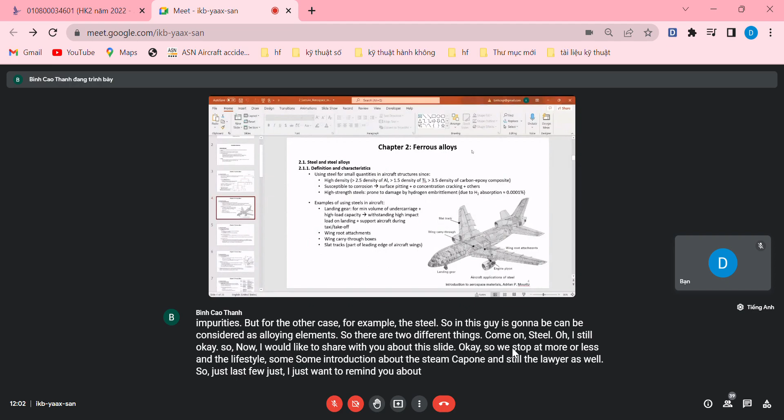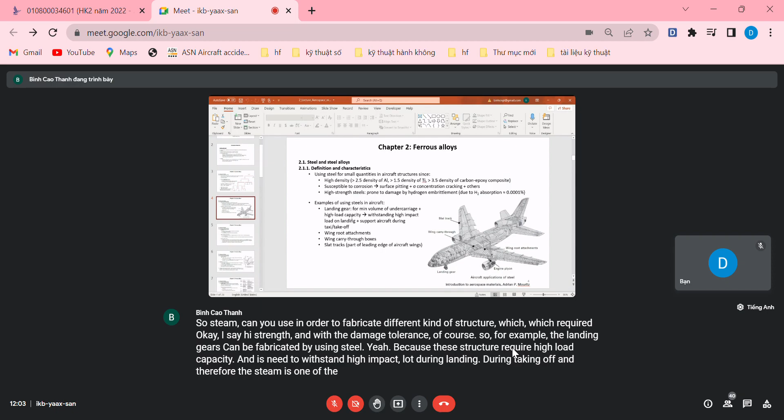I just want to remind you where we can use steel in aircraft. Steel can be used to fabricate different kinds of structures which require high strength and damage tolerance. For example, the landing gears can be fabricated using steel, because this structure requires high load capacity and needs to withstand high impact load during landing and taking off, and therefore steel is one of the promising materials that can be used to fabricate landing gear.

Other structures inside the aircraft that can employ steel as the material include, for example, the wing root attachment, the wing carry-through boxes, and the slat track, as you can see from this figure, these components.

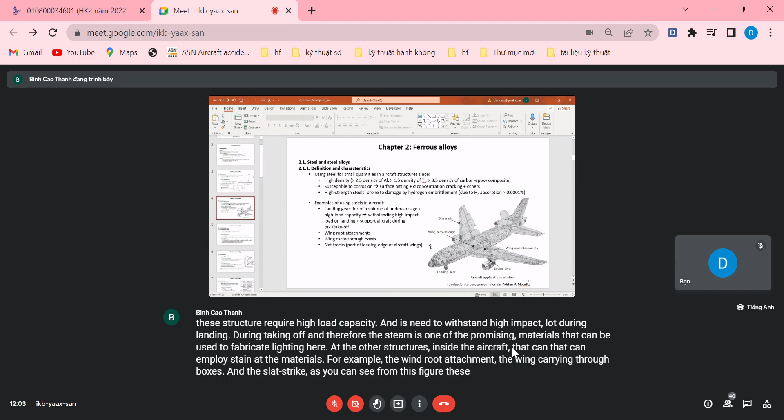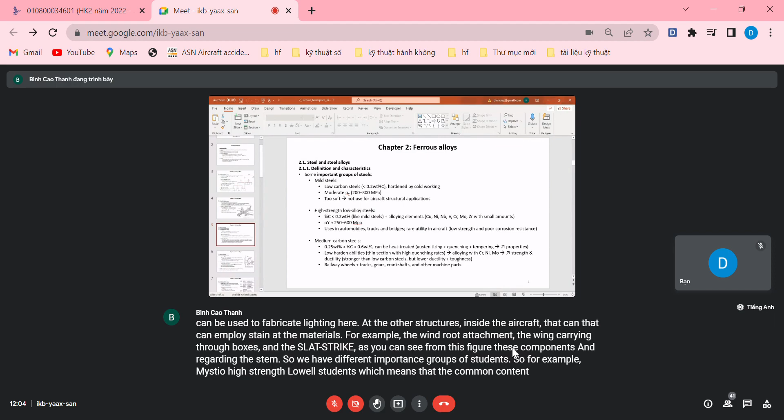Regarding steel, we have different important groups of steel. For example, mild steel, high strength low alloy steels, which means the carbon content is smaller than 0.2 weight percent, in combination with some kind of alloying elements like copper, nickel, niobium, vanadium, chrome, molybdenum, and zirconium. Zirconium is some kind of ceramic material, so you may not be familiar with this type of element. We may call them rare earth elements.

So the strength of the high strength low alloy steel can range from 250 up to 600 megapascal. It's not so high, but it can be used for automotive applications, trucks, and bridges. But since the strength is not enough, it cannot be used in the case of aircraft, especially in terms of strength and corrosion resistance, which need higher values in order to be applied for fabricating aircraft structures.

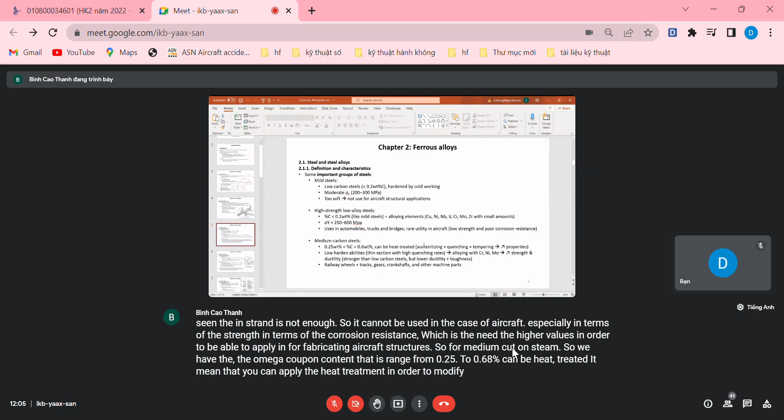For medium carbon steel, the amount of carbon content ranges from 0.25 up to 0.6%, and it can be heat treated. This means you can apply heat treatment to modify properties of the steel. So basically we need to apply heat treatment to improve properties. I do not want to focus so much on this steel because we talked about it last week, so I just want to remind you of some points we already discussed.

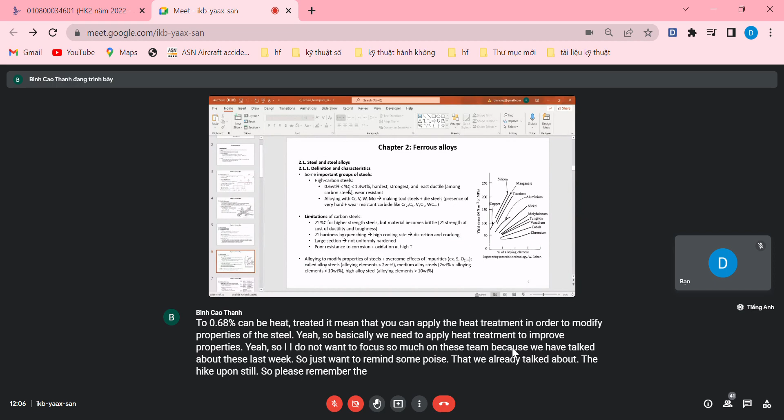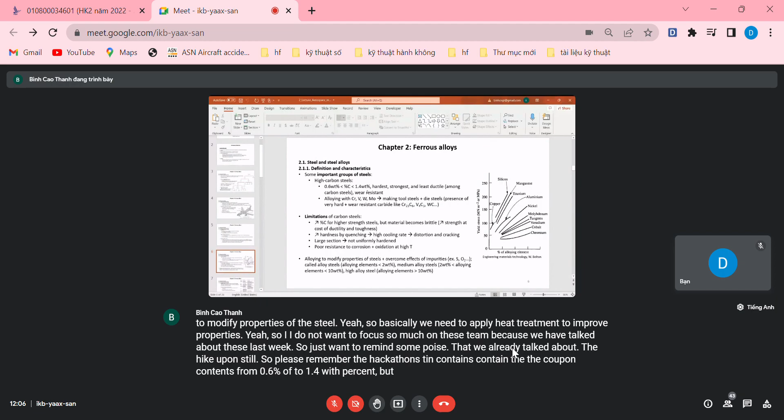The high carbon steel, please remember, contains carbon content from 0.6 weight% up to 1.4 weight%. But please remember that the higher the amount of carbon content, the more brittle the material is, and therefore the amount of carbon content should be controlled. The higher amount of carbon content, the less ductile the material is, so because it's more brittle, in other words, less ductile. Yes, but it has a higher ability of resistance because of the enhancement of carbide, which forms based on the higher amount of carbon content.

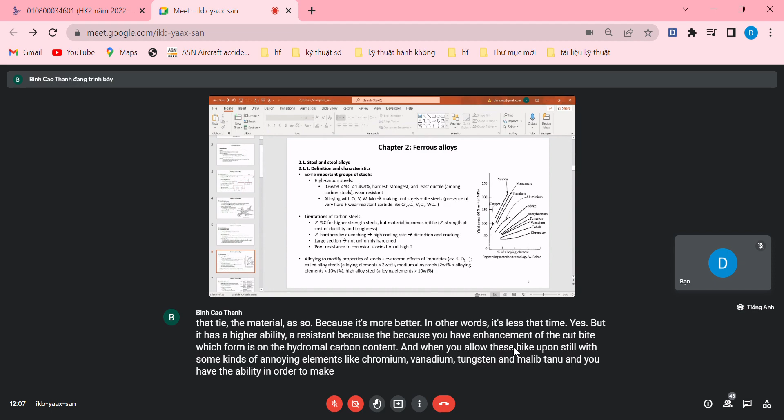When you alloy this high carbon steel with alloying elements like chromium, vanadium, tungsten, and molybdenum, you have the ability to make tool steel or die steel. This is because there's a possibility to form different kinds of carbides, like Cr23C6 or V4C3, which can enhance the wear resistance of the material.

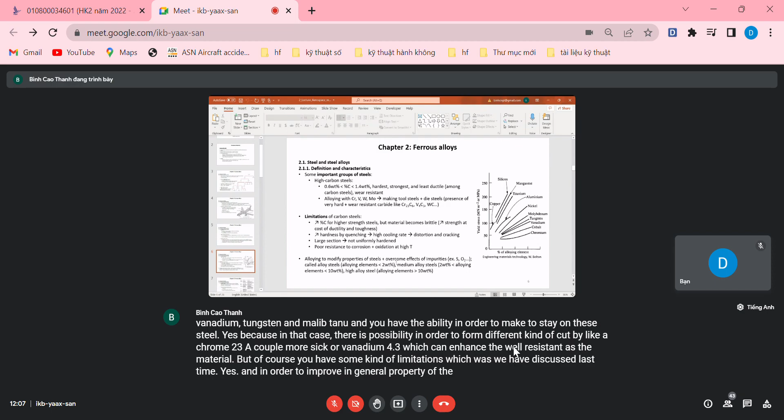But of course, you have some kind of limitations, which we discussed last time. And in order to improve the general properties of the steel, you need to add alloying elements. Depending on the amount of alloying elements, you can classify alloy steel into different categories.

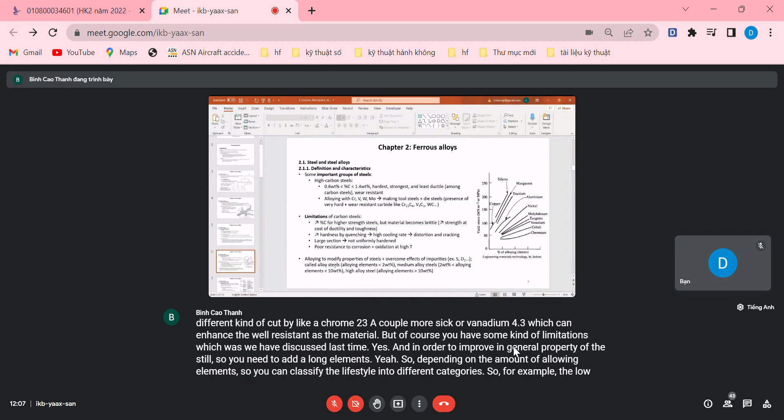For example, low alloy steel, medium alloy steel, or high alloy steel, where the alloying elements are larger than 10 weight%. If you look at the graph on the right side of this slide, you have the relation between the yield strength and the amount of alloying elements.

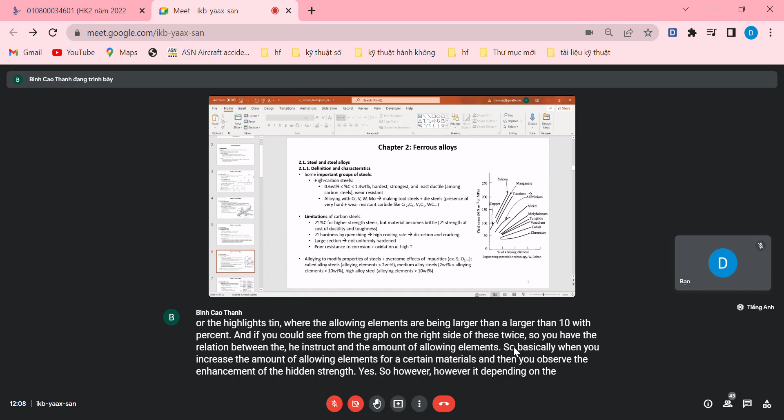Basically, when you increase the amount of alloying elements for certain materials, you observe enhancement of the yield strength. However, depending on the alloying elements selected for steel, we have different degrees of enhancement.

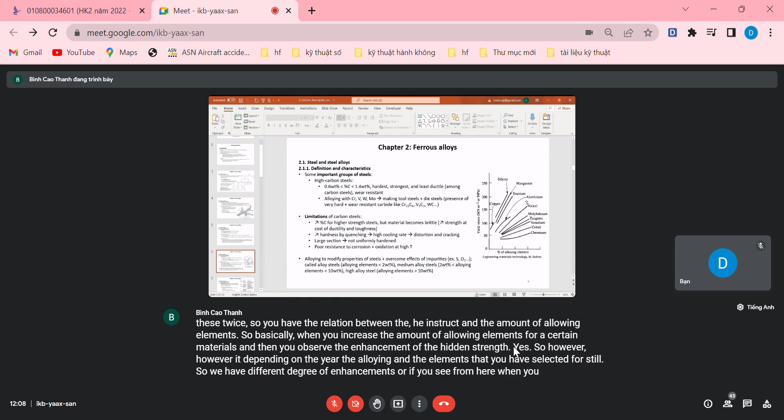If you look here, when you alloy the steel with titanium, you have more or less the highest slope of the line. So it means that with a small amount of titanium as an alloying element, you have a significant enhancement in terms of the yield strength. It's quite easy to observe here.

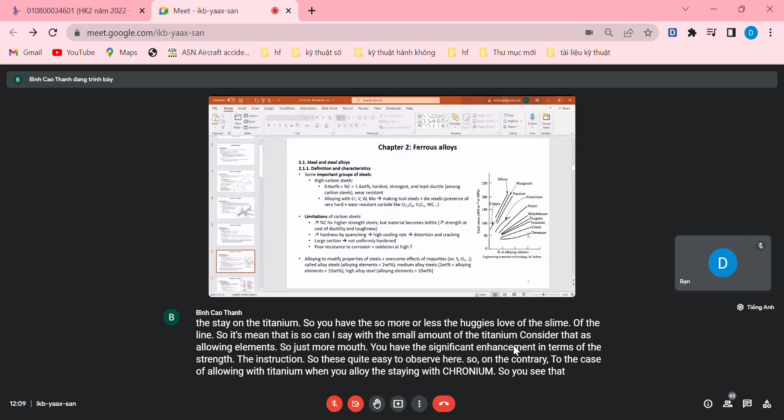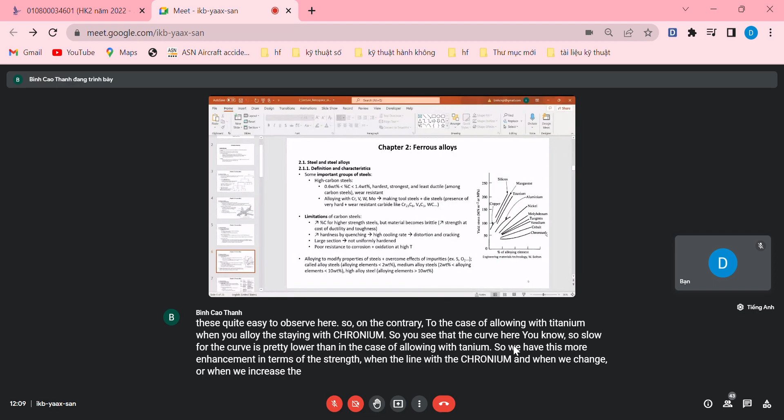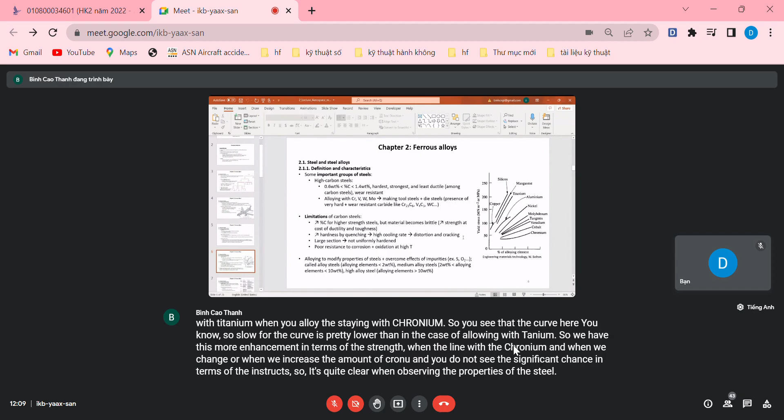On the contrary, when you alloy the steel with chromium, the slope of the curve is pretty lower than in the case of alloying with titanium. So there's less enhancement in terms of strength when alloying with chromium, and when you increase the amount of chromium, you do not see significant change in terms of the yield stress. It's quite clear when observing the properties of the steel, the yield stress as a function of percent of alloying elements.

So the other important group of steel is stainless steel. Stainless steel is one type of steel which can be synthesized by alloying with a high amount of chromium, for example, at least 11% by weight of chromium.

Together with chromium, you can add additional alloying elements, such as nickel or molybdenum, for improving corrosion resistance of the steel. There are three types of stainless steel which we mentioned last time: martensitic stainless steel, austenitic stainless steel, and ferritic stainless steel.

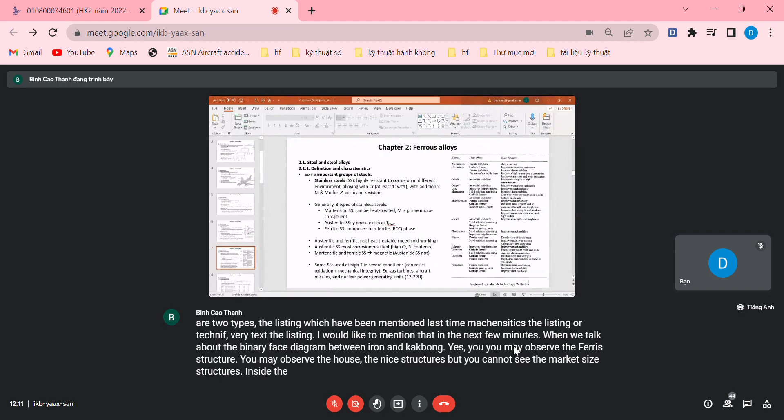I would like to mention that in the next few minutes, when we talk about the binary phase diagram between iron and carbon, you may observe the ferrite structure and the austenite structure, but you cannot see the martensite structure inside the binary phase diagram, just because this is the binary phase diagram for iron and carbon, whereas we are talking about alloy steel.

Stainless steel is alloy steel, because apart from iron and carbon, you also have some kind of alloying elements.

Let me see, let me see. Okay, I already turned on my mic just to be sure, because... I want to check whether or not I have already turned on my microphone. Otherwise it's a waste of time to talk for 12 minutes and you could not hear anything.

So basically, I would like to highlight here that stainless steels are alloy steel, steel which is composed of iron, carbon, and other types of alloying elements, like chromium, nickel, or molybdenum. With the presence of the alloying elements, the binary phase diagram will be modified, so it no longer looks like the one that you will be introduced to.

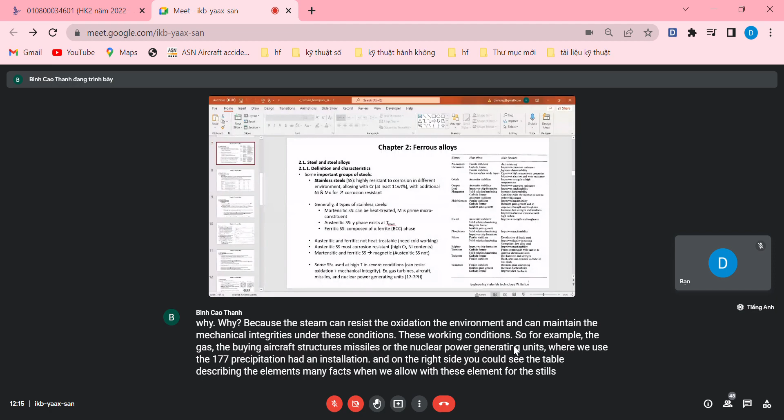On the right side you can see the table describing the elements, their effects when alloyed into the steel, and the main function - which application the material can be used for.

You can see it can be used to improve corrosion resistance, and then used to fabricate different types of structures that work in conditions that promote corrosion, because it improves corrosion resistance. So there would be no problem using this steel in corrosive environments. For example, you can see from here...

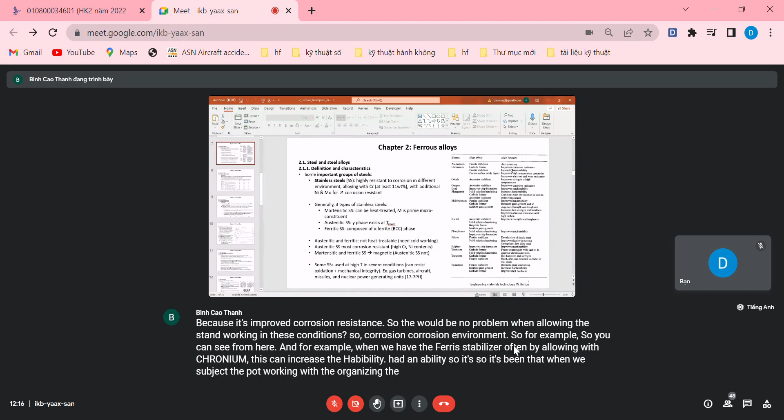For example, when we have the ferrite stabilizer obtained by alloying with chromium, this can increase the hardenability. So when a part is subjected to sliding contact between two surfaces, if both surfaces are made of stainless steel alloyed with chromium, it should be okay to a certain extent - because it increases the hardness of the material, and therefore reduces the amount of wear.

So I've discussed the main effects and functions of some elements when alloyed in steel. Now, the important group of steel called maraging steel - it is simply a combination of 'martensite' and 'aging'. That's why it's called maraging.

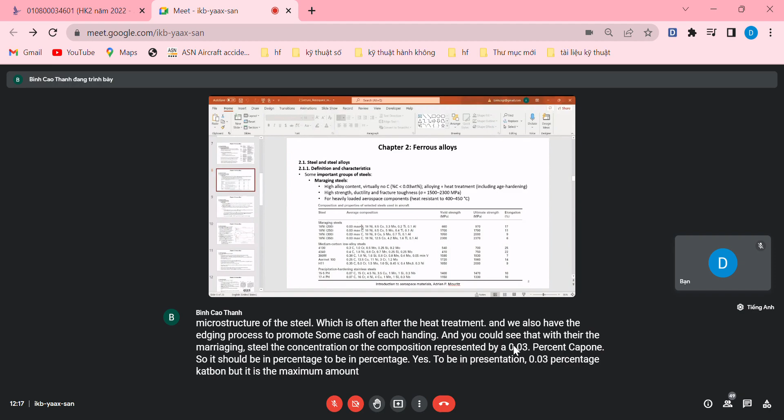Martensite is the microstructure of the steel obtained after heat treatment, and we also have an aging process to promote some kind of age hardening. You can see that with maraging steel, the composition is represented by 0.03% carbon - this is the maximum carbon content in this kind of maraging stainless steel.

We have a pretty high amount of nickel, at 18%, 8.5% cobalt, 3.3% molybdenum. There should not be too high an amount of titanium, because the presence of titanium carbide makes the material more brittle, meaning less ductile. So we control the acceptable amount of titanium inside the maraging steel.

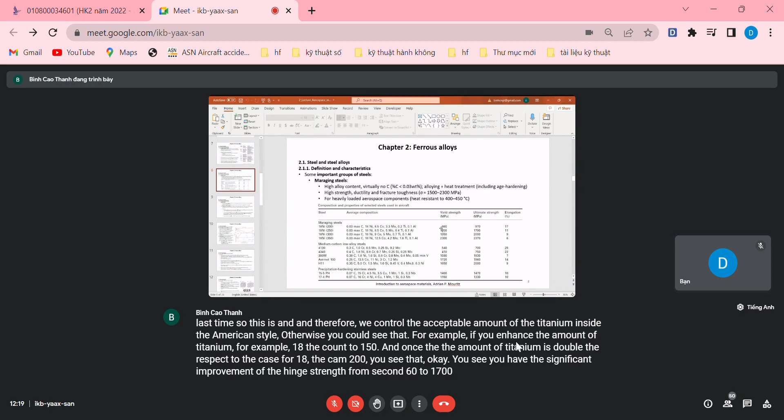Otherwise, if you enhance the amount of titanium - for example, going from 18 Nickel 200 to 18 Nickel 250, doubling the titanium - you see a significant improvement in yield strength from 660 to 1700. But then you have a considerable reduction in elongation from 17% down to 11%. So the ductility is reduced, or in other words, the ability to withstand impact force is reduced.

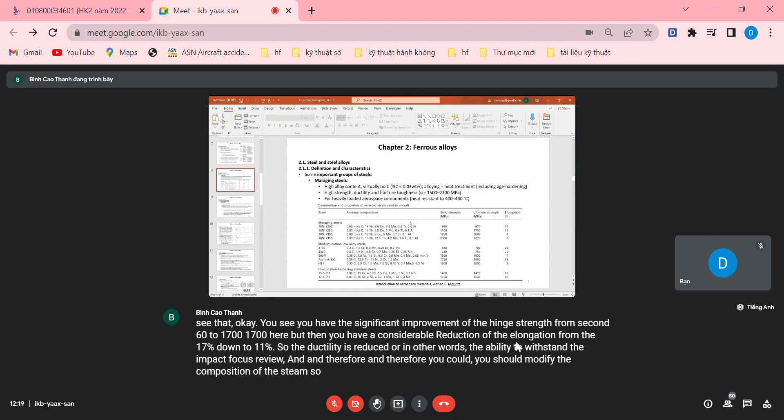Therefore you should modify the composition of the steel so you can balance between hardness and ductility - you need to find a trade-off between the two. Otherwise, if too brittle, you may have sudden failure under working conditions. But if too ductile, the strength is low, so it's easy to deform under external loads. That's what you should pay attention to.

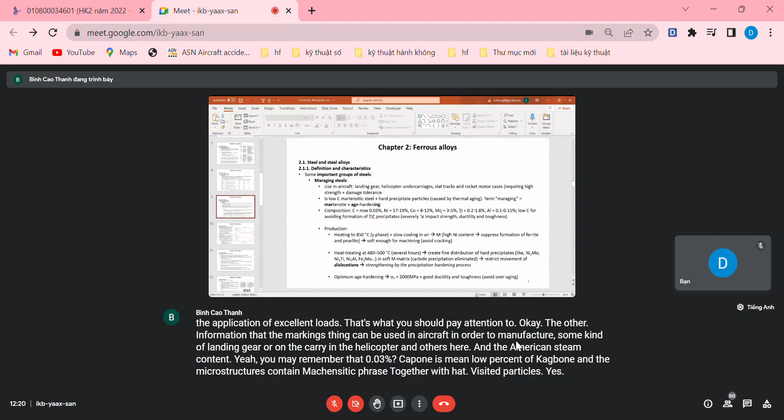The maraging steel content, you may remember, has 0.03% carbon, meaning a low percent of carbon, and the microstructure contains a martensitic phase together with hard precipitate particles. The name is constructed from maraging, combining martensite and age hardening, so maraging.

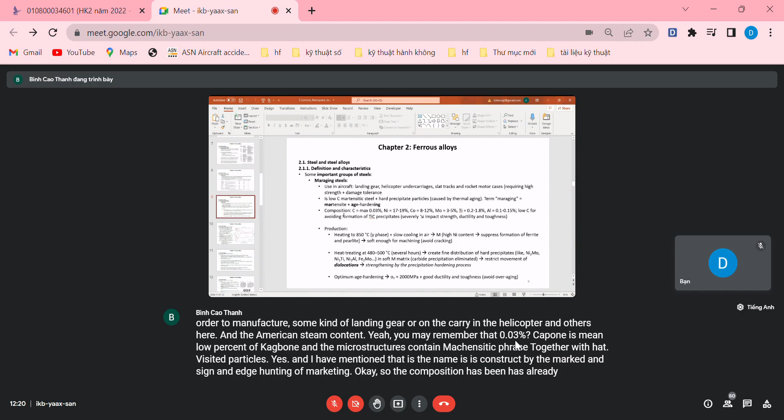The composition has already been highlighted on the table on the previous slides, so there's no need to talk about it.

For production, you can use some kind of heat treatment. You heat up the material to 850 degrees C to fully form the austenite phase, and then slow cool in air.

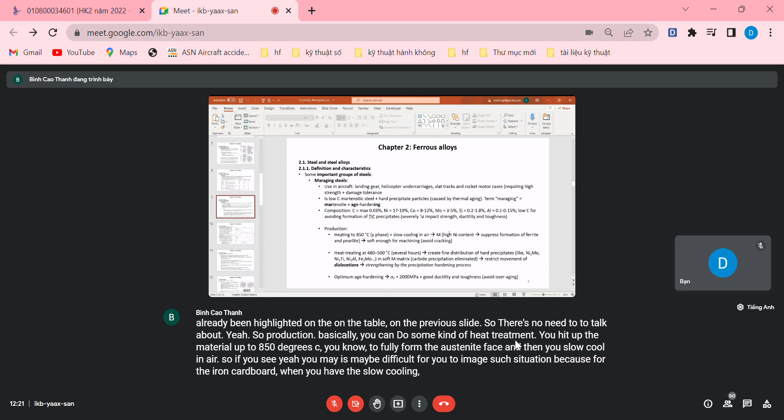It may be difficult to imagine this because for plain iron carbon steel, with slow cooling you cannot have martensite. But for alloy steel, with slow cooling in air, you can have martensite. That's the thing you should distinguish between alloy steel and carbon steel.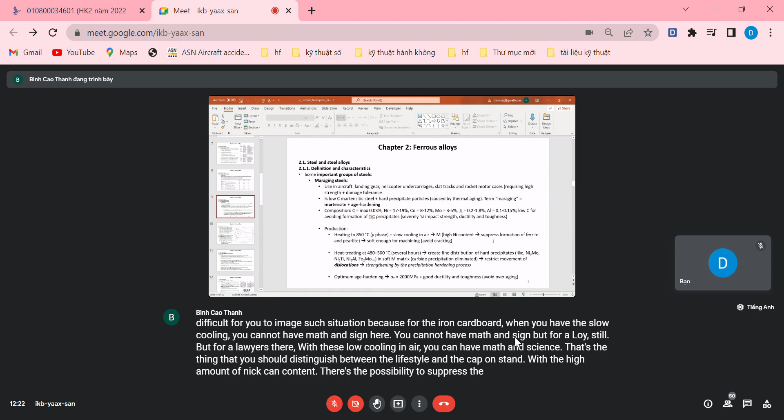With the high amount of nickel content, there's a possibility to suppress the formation of ferrite and pearlite. In other words, it promotes the formation of martensite, which in this case is soft enough for machining. Other phases, for example ferrite and pearlite, are more ductile, so it's a little more difficult for machining.

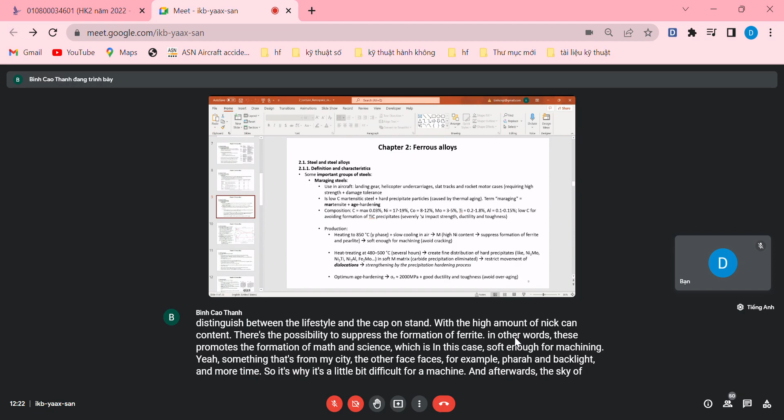Afterwards, there's an age hardening process where you apply heat treatment at around 500 degrees C for several hours. The aim is to create a fine distribution of hard particles, for example nickel-3-molybdenum, nickel-3-titanium, nickel-3-aluminum, and so on, in a soft metal matrix.

We have the distribution of the second hard phase, the precipitate particles, in the metal matrix, and these restrict the movement of dislocations. This gives the strengthening mechanism called precipitation hardening.

I will introduce this to you later, but just some information first. When we talk about the mechanism, I will tell you a little more detail about the precipitation hardening process.

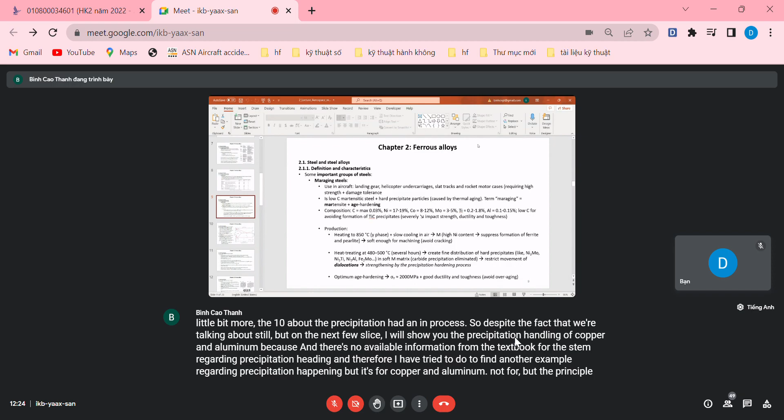Despite the fact that we're talking about steel, in the next few slides I will show you precipitation hardening of copper and aluminum, because there's no available information from the textbook for steel regarding precipitation hardening. So I found another example using copper and aluminum instead, but the principle for the hardening process is the same.

The optimal age hardening can help create a steel with quite high strength, so the yield strength can approach 2000 megapascals, together with good ductility and toughness.

However, we should avoid over-aging. Up to a certain degree, aging is a function of time, but if you maintain the age hardening process longer than needed, you get a reduction in strength.

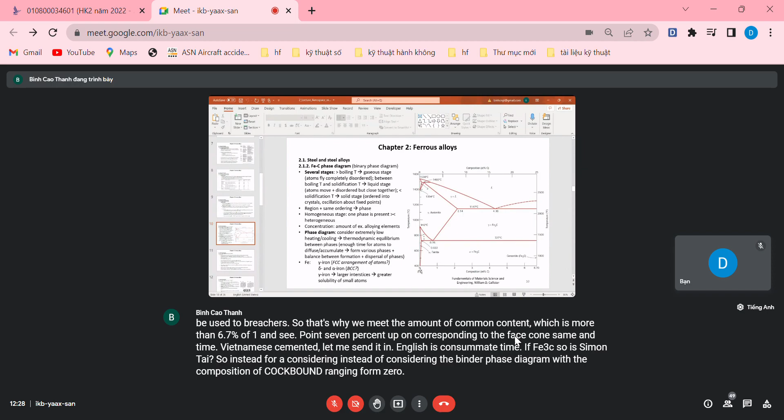Fe3C, so it's cementite. Instead of considering the binary phase diagram with the composition of carbon ranging from 0 to 100% on the carbon axis, we just investigate the binary phase diagram in a restricted area, ranging from 0 up to 6.70% of carbon.

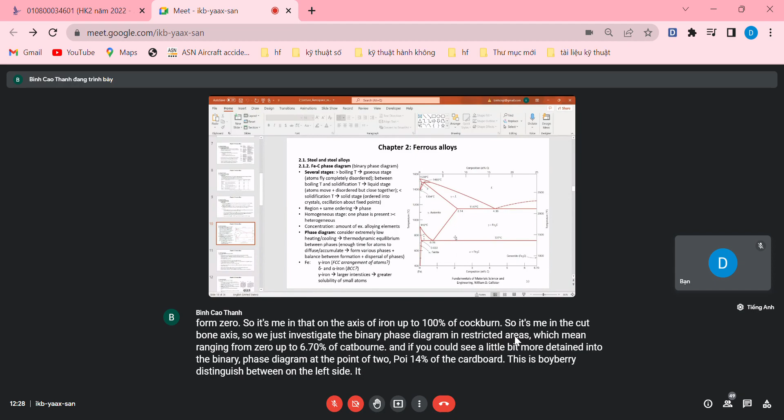If you look in more detail into the binary phase diagram, at the point of 2.14% of carbon, this is where we distinguish: on the left side is the steel, carbon steel, and on the right side is the iron, cast iron. So the steel, called in Vietnamese thép, is below 2.14% of carbon, and above that we have cast iron, in Vietnamese gang trắng.

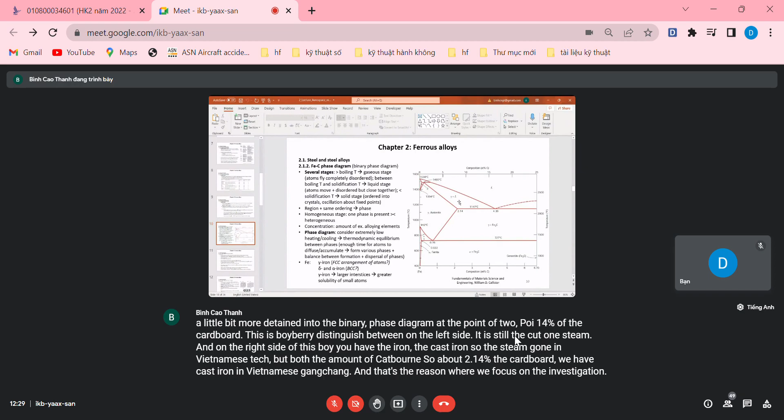And that's the reason why we focus on the investigation of steel, so we have the amount of carbon content ranging from more than 0 up to 2.14 weight percent.

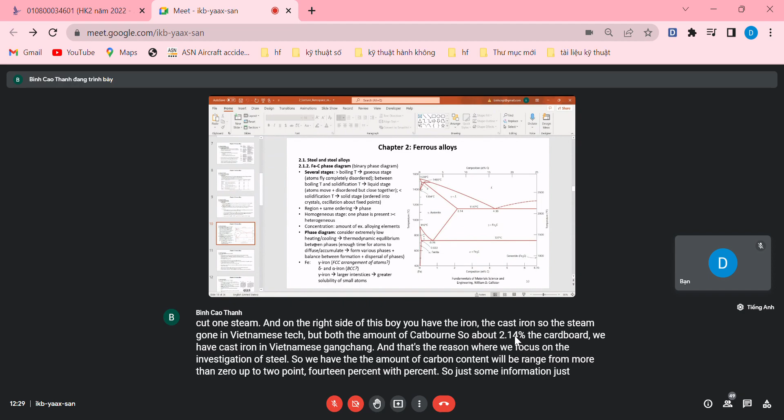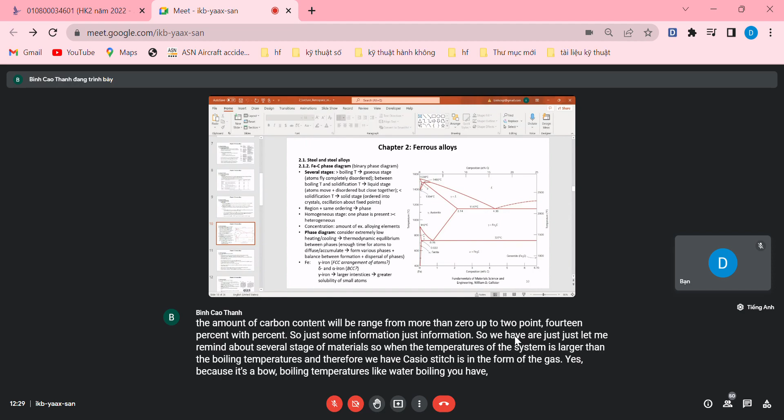So just some information, let me remind you about several stages of materials. When the temperature of the system is larger than the boiling temperature, we have the gaseous stage, in the form of gas. Like water boiling, you have the gas phase of the water.

Similarly, when we apply to metallic materials a temperature higher than the boiling temperature, the gaseous stage of the material is formed. The atoms fly completely disordered, because it's the gas phase.

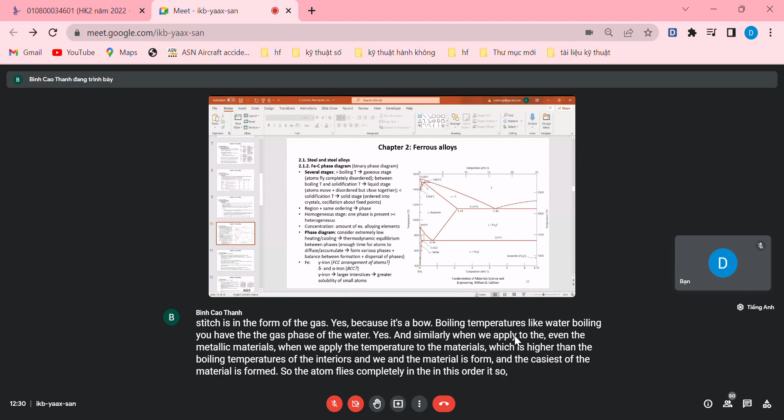And between the boiling temperature and the solidification temperature, we have the liquid stage of the material. The atoms are still in disorder position, but close together, and these atoms can move.

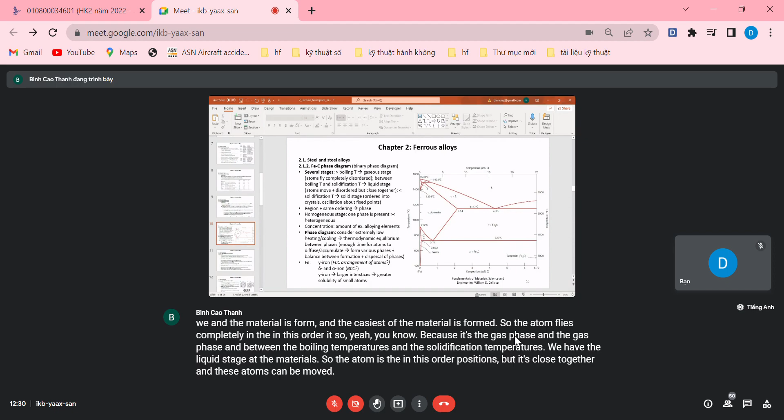And when the temperature is smaller than the solidification temperature, we have the solid stage, meaning it turned from liquid to solid when the temperature passed through the solidification temperature. When the material is solidified in the solid stage, the atoms are kept ordered in crystals, in crystal form.

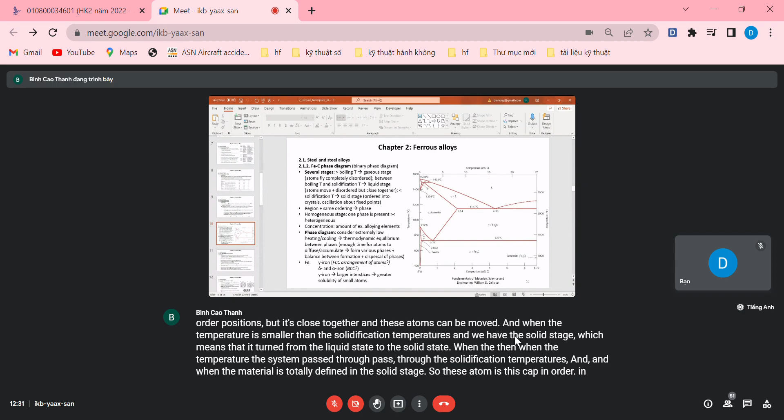And if we provide enough energy to the solid form of the material, these atoms can oscillate about a fixed point, but cannot move to another position. This is oscillating around an equilibrium point, in the lattice structure.

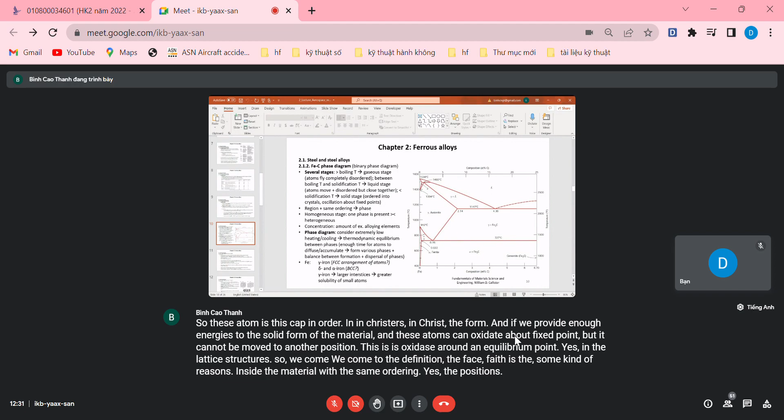So we come to the definition of phase. Phase is some kind of region inside the material with the same ordering, meaning the positions of the atoms inside this region. So if we maintain the same ordering inside a region, this region belongs to one phase.

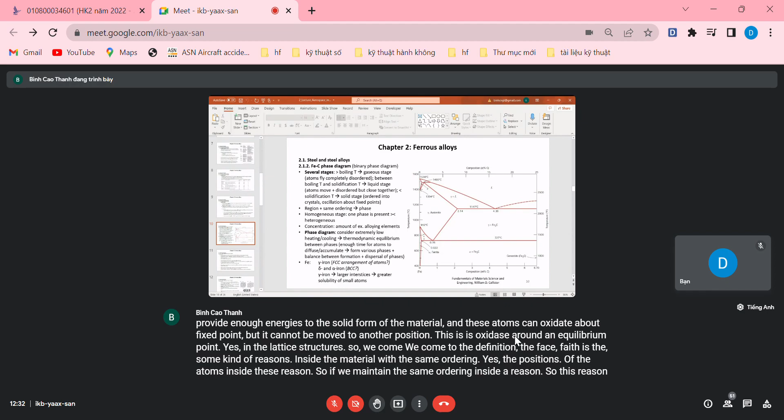So what is the homogeneous stage? It is the one phase - we have a stage which is homogeneous when there is one phase present. If we have several phases present at the same time, we have the heterogeneous stage. Homogeneous is called trạng thái đồng nhất, and heterogeneous is trạng thái không đồng nhất.

Concentration is the amount of alloying elements. We can call it nồng độ, concentration.

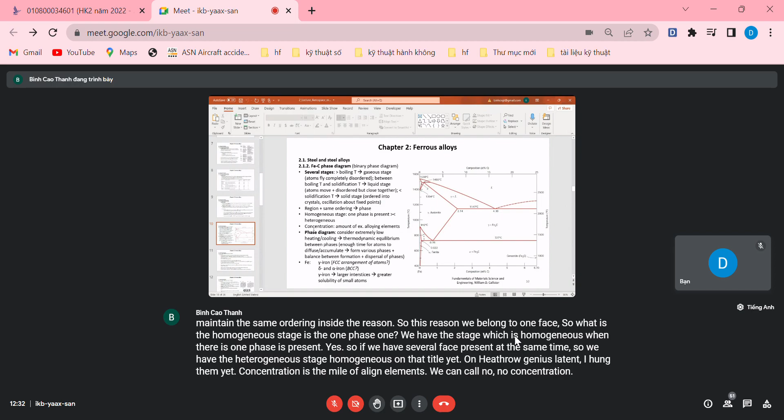And the phase diagram, like you could see on the right side of this slide, can be constructed when we consider extremely low heating or cooling of the materials. So the phase present here can be obtained by extremely low cooling or heating the material, which is composed of iron and cementite, or iron and carbon - because even cementite is made of iron and carbon, Fe and C.

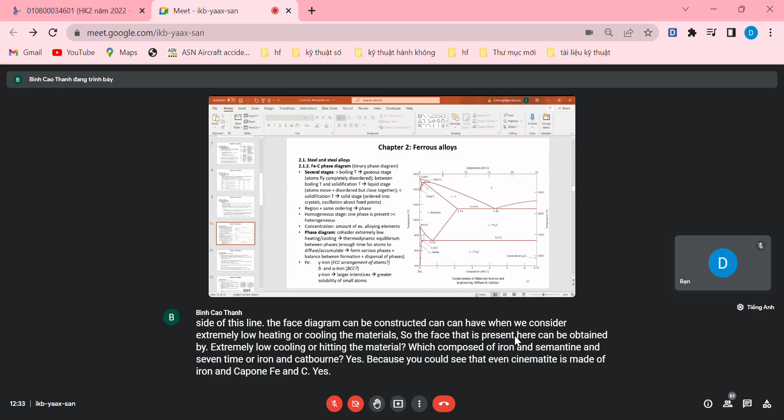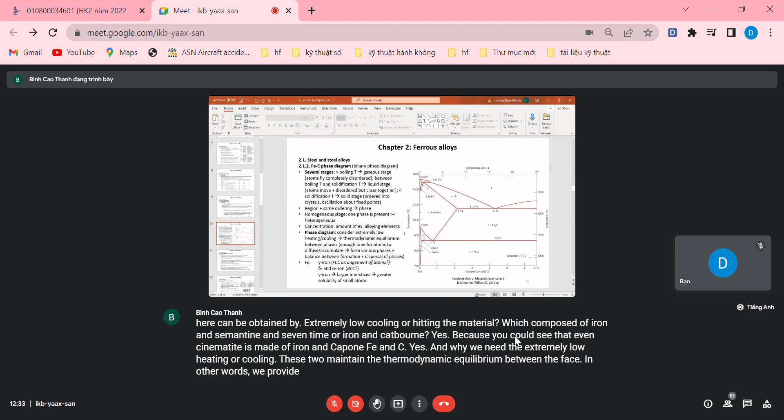And why do we need extremely low heating or cooling? This is to maintain the thermodynamic equilibrium between the phases. In other words, we provide conditions so that we have enough time for atoms to diffuse, to form a type of phase here.

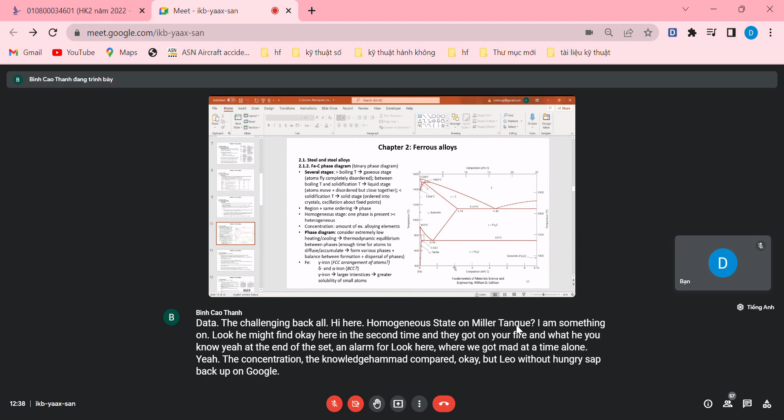Concentration thì chúng ta có thể nói ví dụ về hàm lượng của nguyên tố carbon ở trong thép. Với hàm lượng carbon nhỏ hơn 2,14% carbon thì vật liệu được tạo thành bởi sắt và carbon lúc này sẽ là thép. Còn nếu hàm lượng carbon lớn hơn 2,14% cho đến 6,67% carbon thì vật liệu tạo bởi sắt và carbon lúc này sẽ gọi là gang trắng, chứ không gọi là thép nữa. Và đương nhiên gang thì bao giờ cũng giòn hơn so với thép, vì sao? Bởi vì hàm lượng carbon nó lớn hơn ở thép.

Okay, so now we have talked about the iron. Iron is one of the elements, so we know pretty good about iron. However, iron can exist in several kinds of form depending on the temperatures. For example, at room temperature, you could see on the x-axis, on the left side of the binary phase diagram, you have the alpha phase, or the alpha iron. The alpha iron can exist from room temperature up to 912 degrees C.

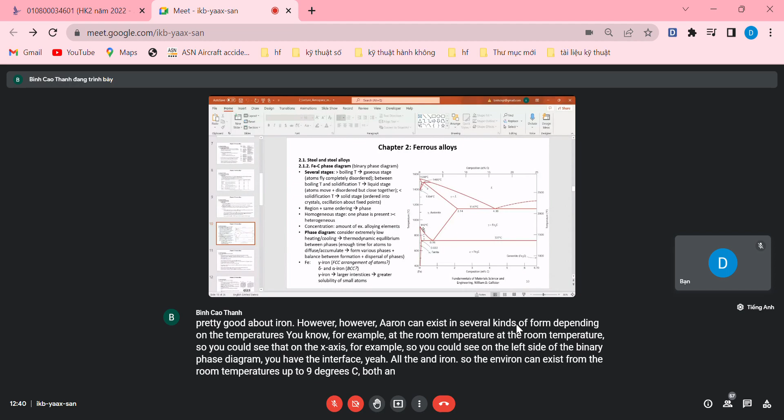Above 912 degrees C, the form of iron is changed from the alpha phase to the gamma phase. We call the austenite - no, it's not actually called austenite, but it's the gamma iron. So above 1394 degrees C, we have the delta iron up to 1538 degrees C. And above 1538 degrees C, the iron will transform to the liquid phase.

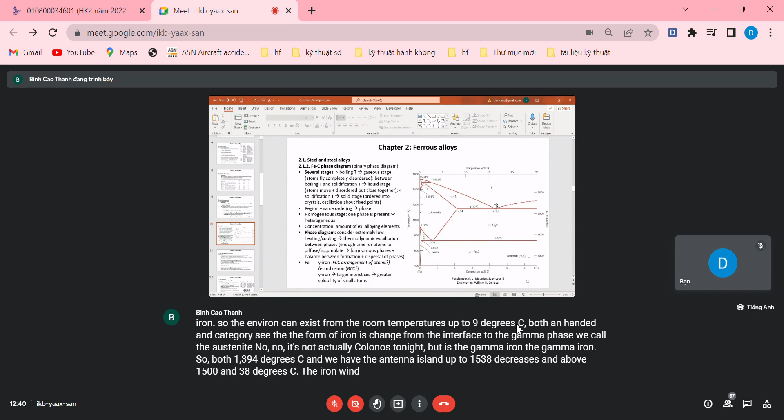So just one thing I would like to highlight here, that we have different kinds of forms of iron, so different kinds of lattice structures. For alpha iron and delta iron, we have the BCC structure, which stands for body center cubic, and the FCC arrangement of atoms called the face center cubic, which we talked about during the last class on last Tuesday. So we have talked about the cell units, and for the BCC we have the cube. We have 8 atoms attached to 8 different vertexes of the cube, and we have 1 atom located in the center of the cube. So this is called the BCC structure.

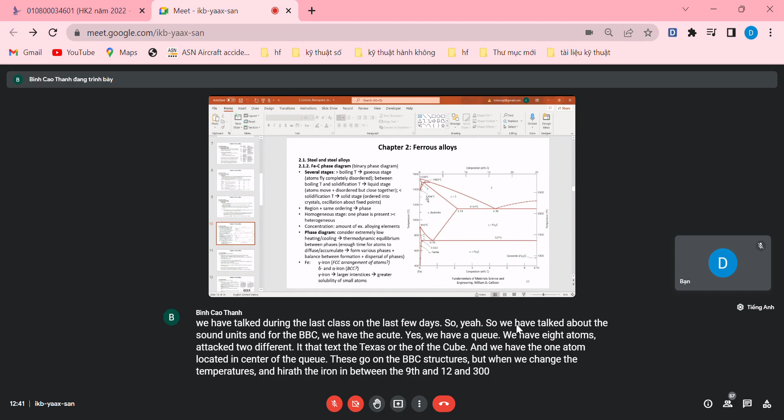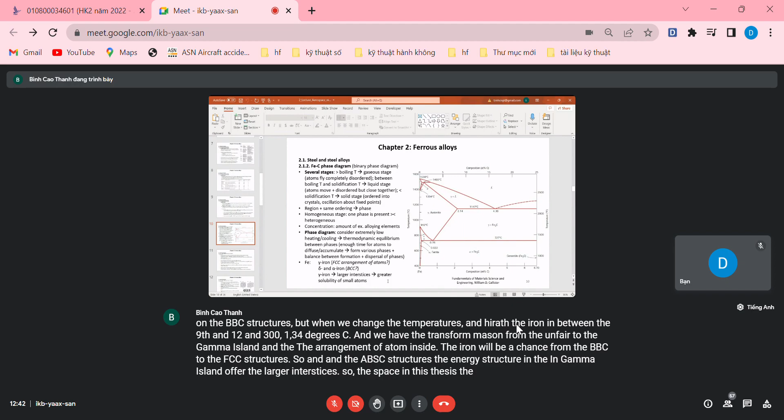But when we change the temperature and heat up the iron in between 912 and 1394 degrees C, we have the transformation from the alpha to the gamma iron, and the arrangement of atoms inside the iron will be changed from the BCC to the FCC structure. And the FCC structure in gamma iron offers larger interstices - the space in between atoms is larger, meaning that you have the larger ability, the larger solubility of small atoms inside the matrix material.

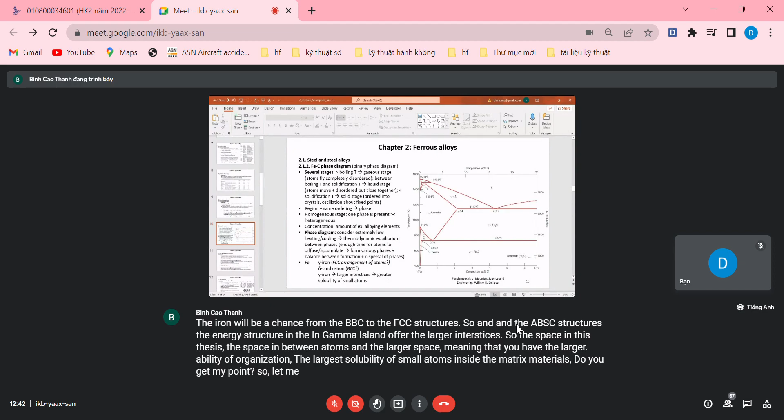Do you get my point? So let me say the allotropic... allotropic, so let me... how can I... allotropic. This is some kind of definition or nomenclature that I should introduce to you. So allotropy, allotropy, which is better.

Dạng thù hình. Tôi lấy ví dụ như thế này nhé. Một vật liệu tạo bởi một nguyên tố chẳng hạn, như là carbon. Thì vật liệu tạo bởi carbon này có các dạng thù hình khác nhau. Ví dụ carbon có thể dưới dạng than cốc, carbon có thể có dưới dạng kim cương, hoặc carbon có thể dưới dạng graphite như ở bút chì chẳng hạn. Đấy, để cho các bạn dễ hình dung.

Thế thì đối với sắt của chúng ta, bởi vì chúng ta đang nói về iron ở đây, thì sắt nó cũng có các allotropic khác nhau, allotropy khác nhau. Dạng thù hình của nó thì một vật liệu nó có thể tồn tại ở nhiều dạng thù hình khác nhau, tùy thuộc vào nhiệt độ hay áp suất tác động lên nó.

Tôi lấy ví dụ như đối với sắt của chúng ta thì ở nhiệt độ từ room temperature, có nghĩa là nhiệt độ môi trường, cho đến 912 độ C, thì cấu trúc của sắt có dạng là sắt alpha. Sắt alpha này có cấu trúc mạng lập phương thể tâm, có nghĩa là BCC.

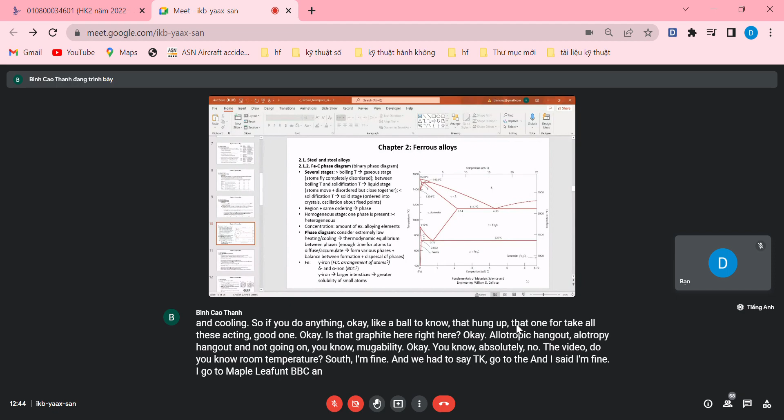Lập phương thể tâm như thế nào thì hôm thứ ba vừa rồi tôi có đề cập với các bạn về cấu trúc mạng của mạng lập phương thể tâm. Ô cơ sở của nó sẽ là hình lập phương, đúng không ạ? Có 8 nguyên tử đính ở 8 đỉnh và 1 nguyên tử đính ở tâm.

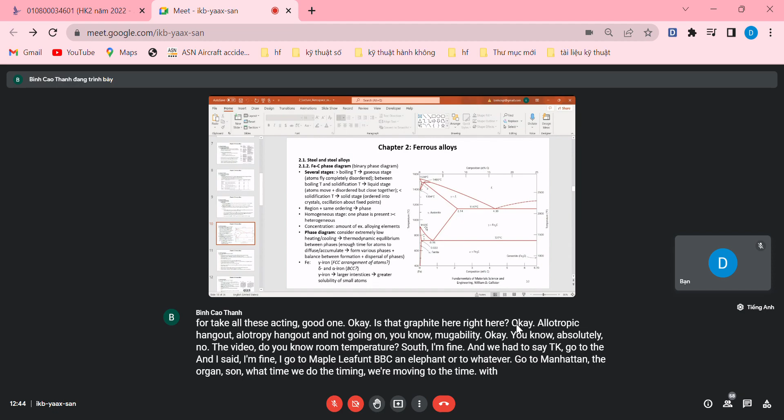Tuy nhiên khi chúng ta nâng nhiệt độ của sắt alpha này vượt quá 912 độ C thì nó có một chuyển biến thù hình. Dạng thù hình của sắt lúc này sẽ thay đổi từ sắt alpha trở thành sắt gamma. Và khi thay đổi dạng thù hình thì cấu trúc mạng cũng sẽ thay đổi theo, từ cấu trúc mạng lập phương thể tâm BCC chuyển thành cấu trúc mạng lập phương diện tâm FCC.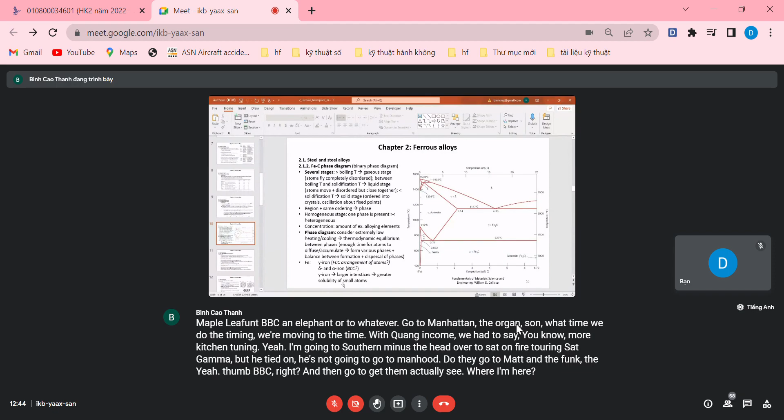Buổi hôm trước tôi cũng có giới thiệu qua với các bạn là do cấu trúc của mạng lập phương, tất nhiên ở đây chúng ta không vẽ ra lỗ hổng interstices, có nghĩa là khoảng cách giữa các vùng giữa các nguyên tử ấy, thì nó bao giờ cũng tồn tại khe hở. Mặc dù chúng ta có nói đến hai kiểu mạng đấy nhưng chúng ta không vẽ lỗ hổng nó ra.

Chúng ta chỉ xem xét mặt xếp chặt thôi, là mặt có mật độ nguyên tử xếp chặt nhất, đúng không ạ? Chúng ta vẽ xong rồi kẻ cái cross section của nó. Tuy nhiên chúng ta không vẽ nên cụ thể lỗ hổng nó trông như thế nào. Tuy nhiên chỉ để nói cho các bạn hình dung là giữa nguyên tử với nhau ấy thì chúng ta giả thiết là hình cầu, dù nguyên tử có xếp chặt như thế nào thì nó cũng tồn tại kẽ hở giữa các mặt cầu đó.

Thế thì đối với kiểu mạng gamma iron ấy, thì lỗ hổng được tạo bởi các bề mặt cầu của các nguyên tử nó lớn hơn, cho nên nó có khả năng hòa tan các nguyên tử nhỏ dễ hơn.

Đấy chính là lý do mà khi người ta tiến hành hợp kim hóa, hay tiến hành bất kể dạng heat treatment nào, thì người ta thường sẽ nung nóng ở trạng thái Austenite hóa để tăng khả năng hòa tan các nguyên tử nhỏ vào trong cấu trúc vật liệu. Tất nhiên ở trạng thái không ổn định thì nó mới dễ tiến hành các chuyển biến, chứ nếu nó lại ở trạng thái ổn định rồi, low free energy, thì rất khó để tạo ra các chuyển biến, đúng không ạ?

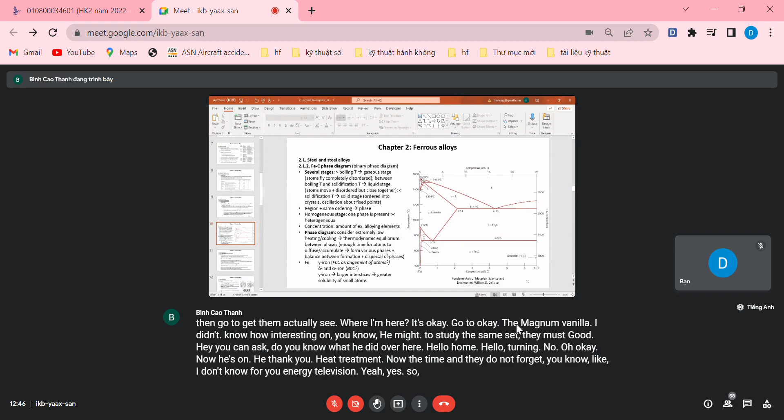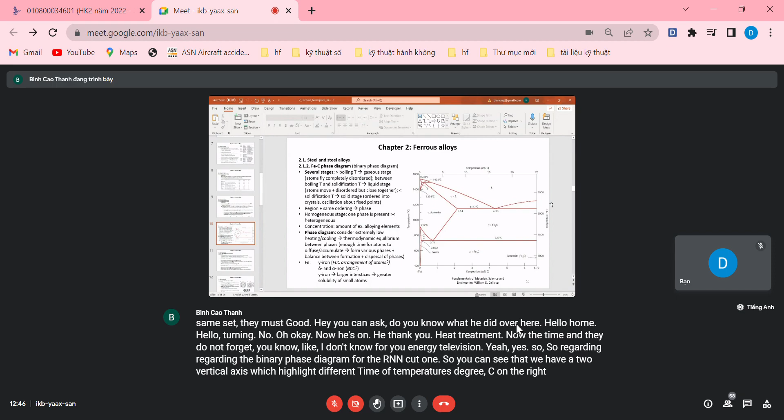Regarding the binary phase diagram for the iron and carbon, you can see that we have two vertical axes which highlight different types of temperatures, degree C on the right side, degree F. Yes, so we pay more attention to the degree C temperatures.

Yes, degree C temperatures. So we have different kinds of phases. For example, the liquid phase, the gamma phase stands for the austenite, delta phase, alpha ferrite we call alpha ferrite, we call delta ferrite, we call austenite, together with the cementite, so Fe3C.

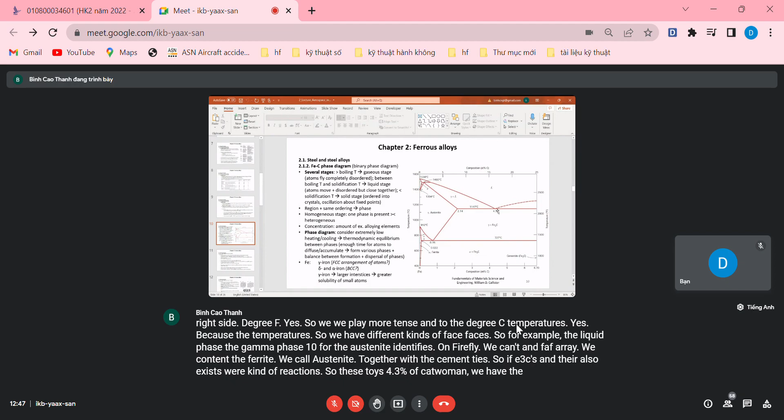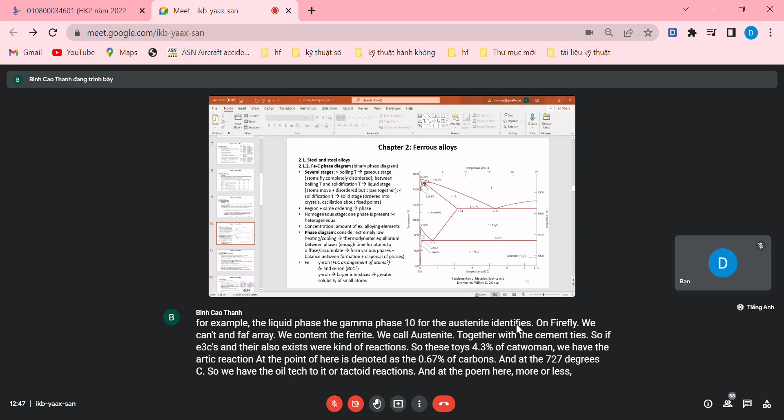And there also exists several kinds of reactions. So at this point, 4.3% of carbon, we have the eutectic reaction. At the point here, denoted as 0.76% of carbon, and at 727 degrees C, we have the eutectoid reaction, and at the point here, more or less, we have the temperature standing at 1493 degrees C, we have the peritectic reaction.

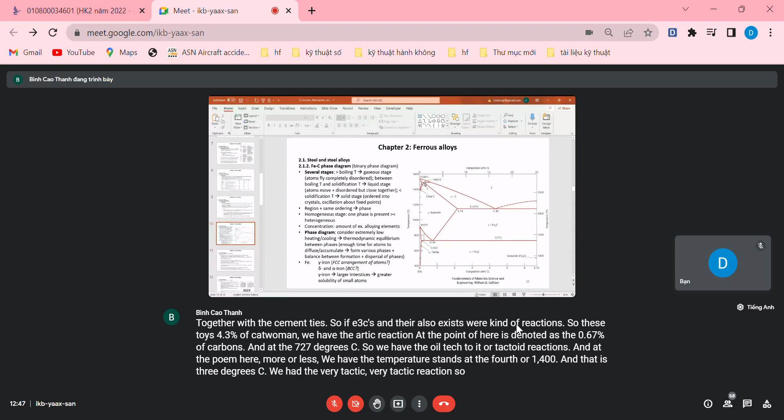So they will be highlighted on the next few slides.